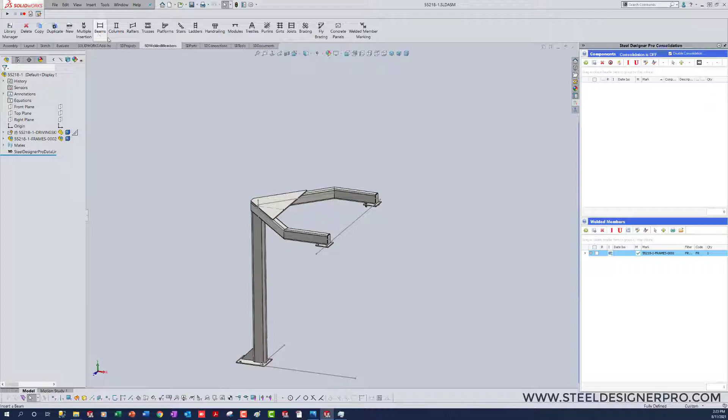Our next welded member is going to be a beam to hang underneath this. It looks like something's not wanting to cooperate with me. Okay, there we go.

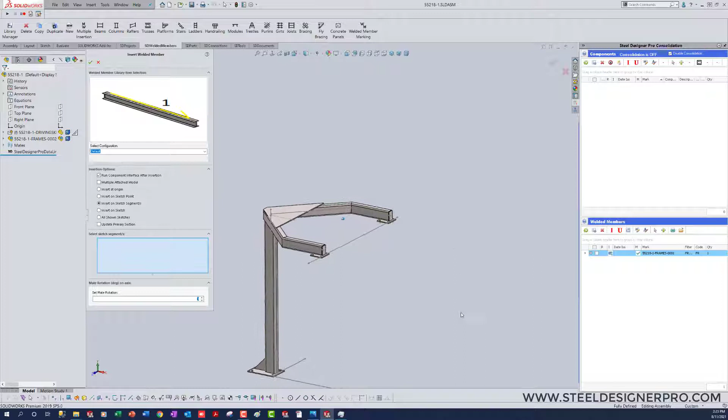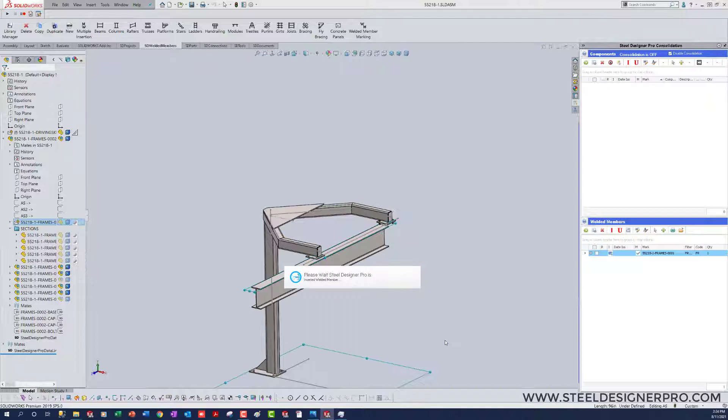So we're going to drop that beam on this line. We'll go ahead and update its section to where it's about a 6 by 12. That brings the beam in from the library, it's updating the section size, and all the associated drawings are coming with it.

And have a tool to hide all those weldment profiles, but it's usually just quicker to do these now.

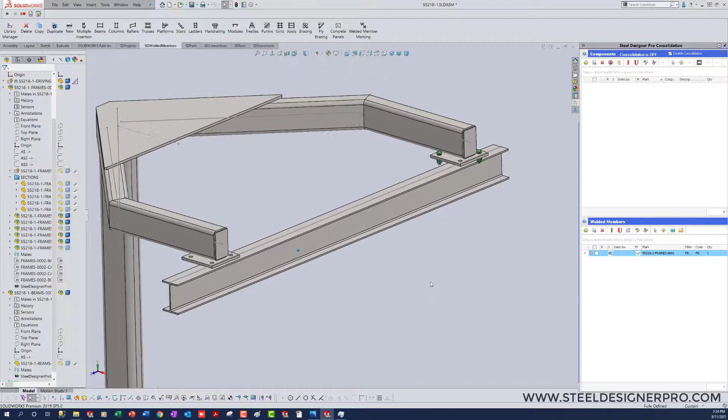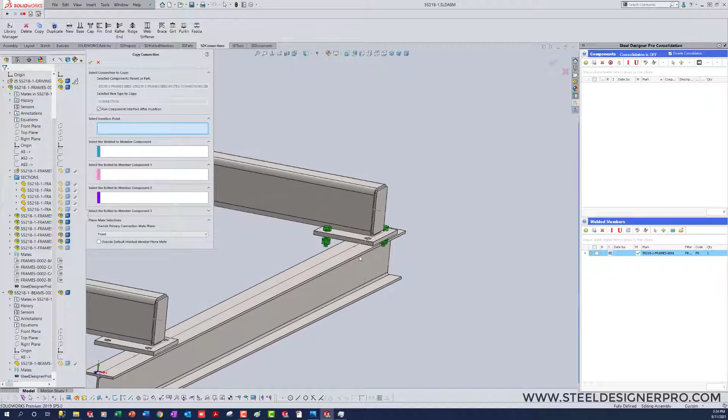I need this connection on top of this beam. It's going to flip itself around and get confused, but it's much faster to just fix the connection than to create another one. So it goes in this spot, it attaches to that welded member.

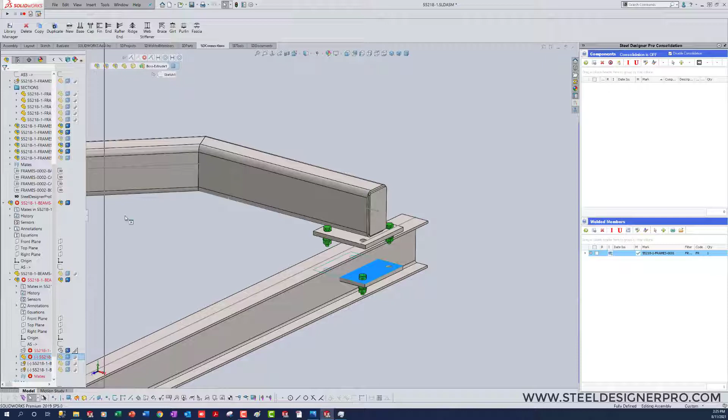And it will get a little confused since it went from HSS to W section. So what we're going to do is first modify section to make this, grab that and put it in the correct spot.

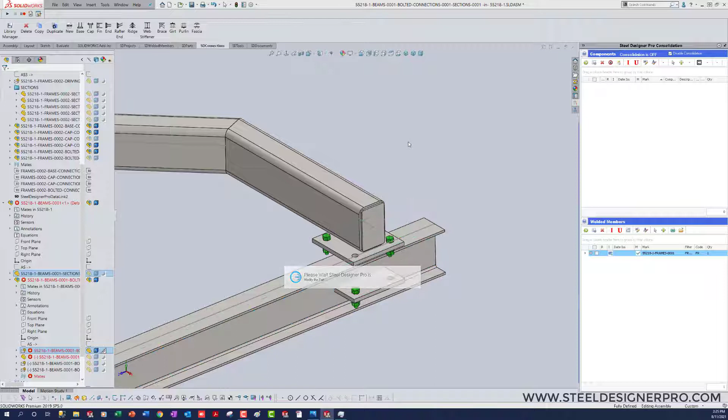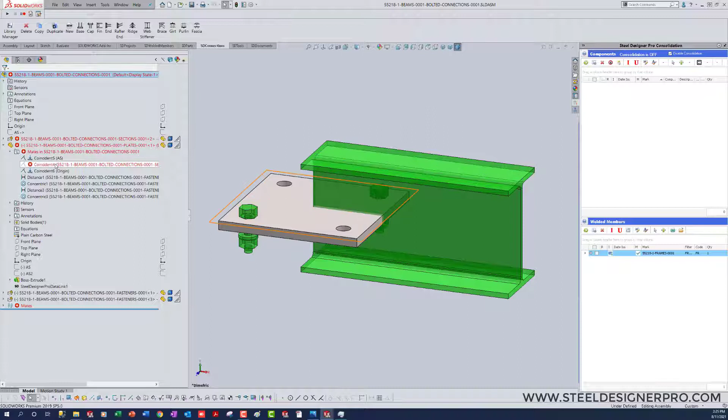Now we'll open this connection. And this plate has lost that face reference.

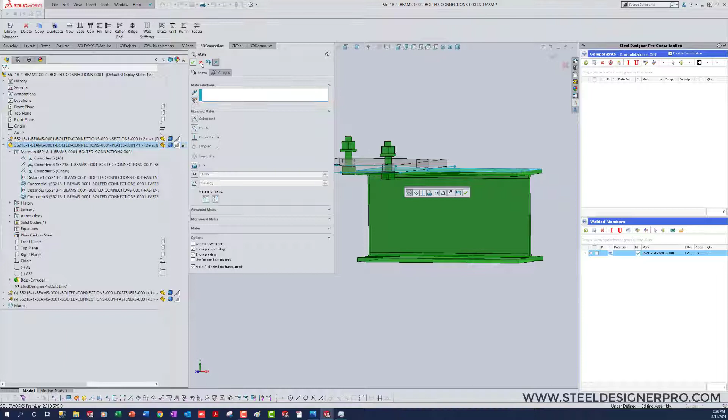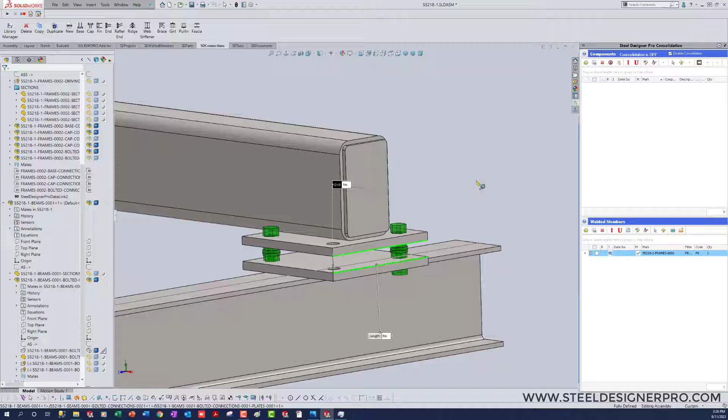And we want to anti-align it. So that's all that's required to clean that up, except for the fact that I didn't choose quite the right dimension here. Yep, off by 1 inch.

Which is very easy to fix in the frame's driving sketch. So the drop plane should have only been 4 inches.

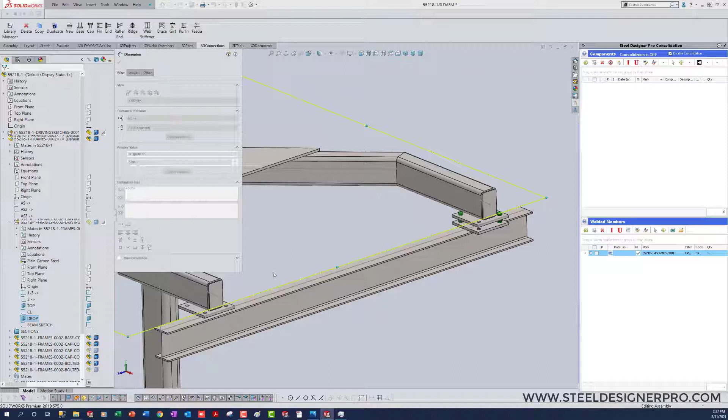And it seems that I still chose my bolts wrong. So I've got doubled up bolts, but I still have the correct number of bolts. And in the beam, here's the bolted connection.

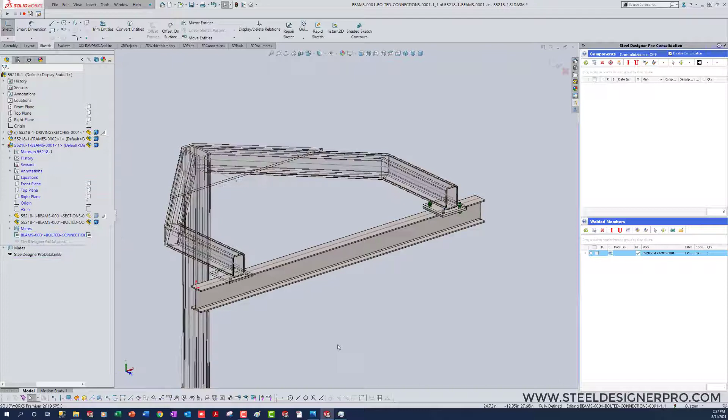So what I'll do is I'll edit this sketch and just convert that point as well. So I can go to this beam and copy that connection.

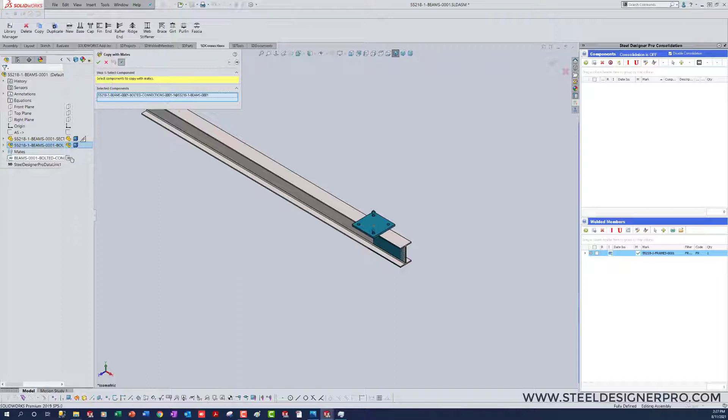And those fasteners are there, they're just hidden as well. So we've created the beam, got it all bolted up.

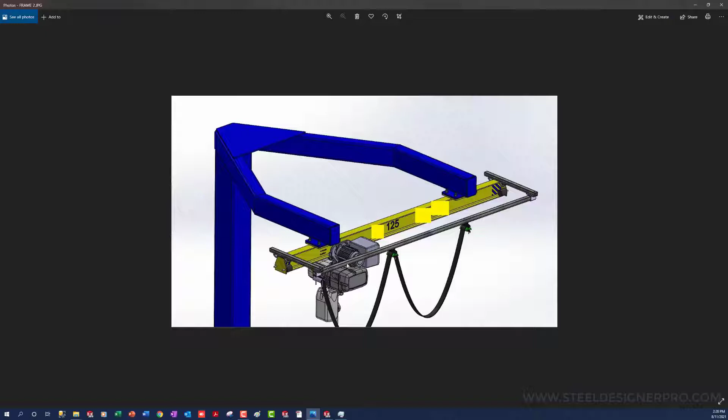Now there's an end cap on each of this and a trolley. And of course I'm not going to put the whole trolley in, but there's a simple way to put that in. So the first thing we're going to do is put the end cap in.

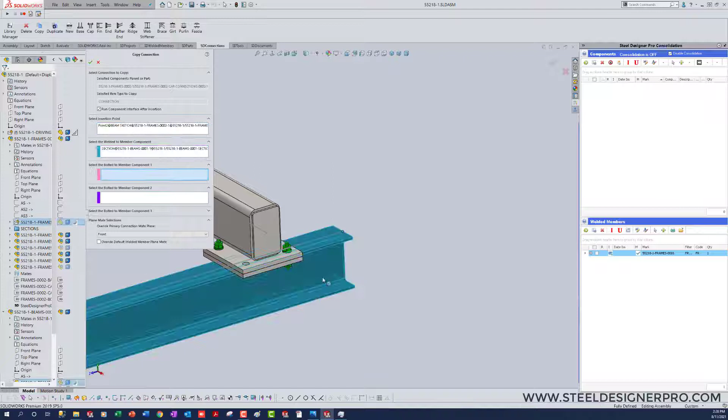Now we have a cap connection here, and just like when we copied this over, it's going to freak out a little bit, but it's so much easier to fix it than it is to do it again.

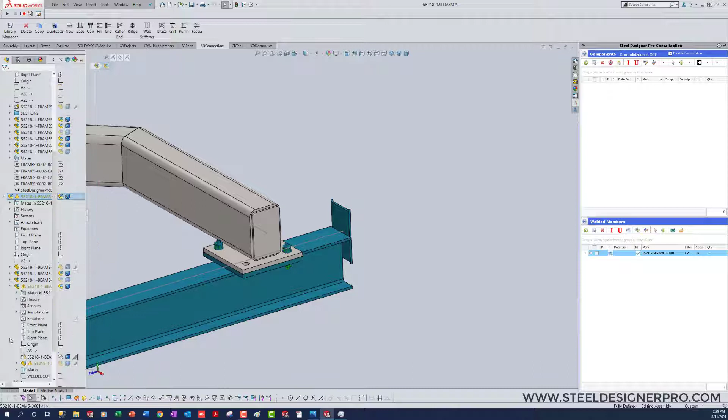So now the beam, said it's faulted there. It's faulted because the plate has lost its mind. And we'll do the other modify section to make these two match.

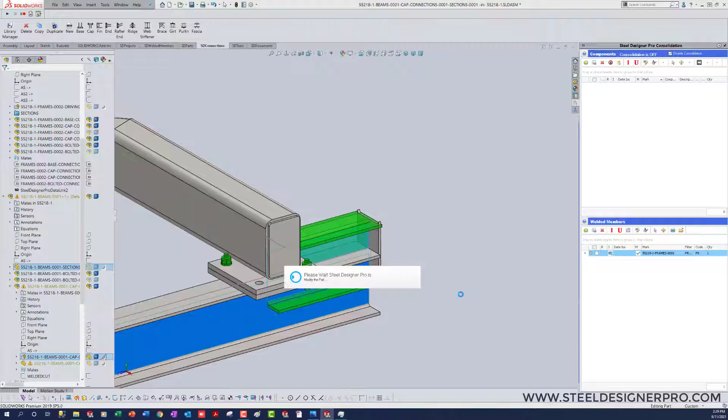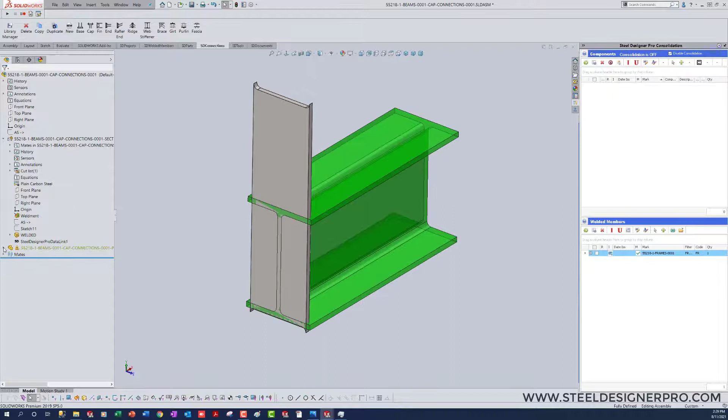There we go. Now we'll grab that assembly. And for one thing, what we're going to do is we're going to get rid of the welded cut. We're not going to have this beam get cut. So we'll just edit this feature, flip its direction, and make it 1/2 inch.

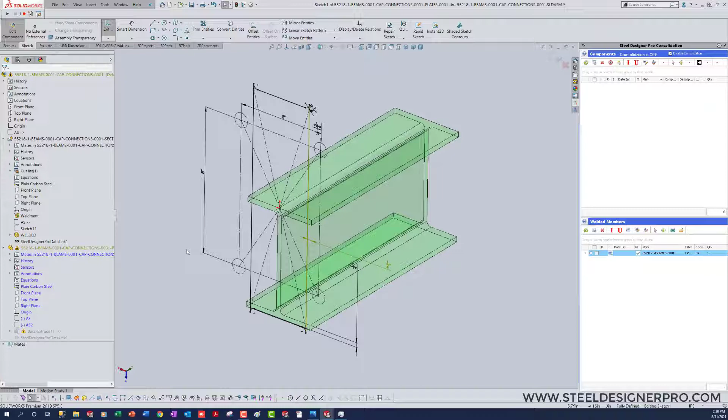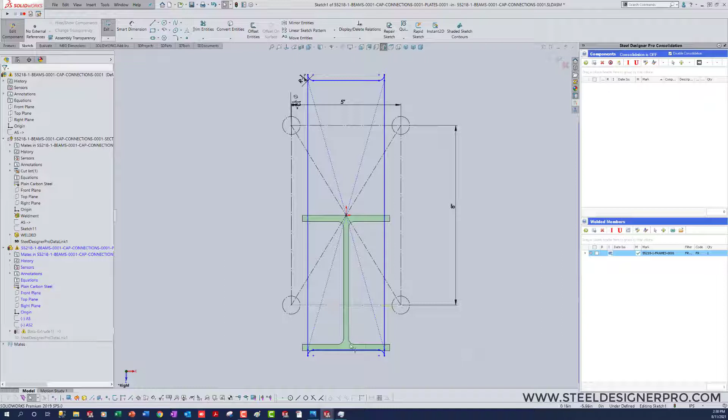Now we're going to edit the sketch and do a few things. So we'll take and get rid of, hang on. Don't want to do that, hang on.

Let's see how much work I can save myself. Aha, yes, there we go. There we go.

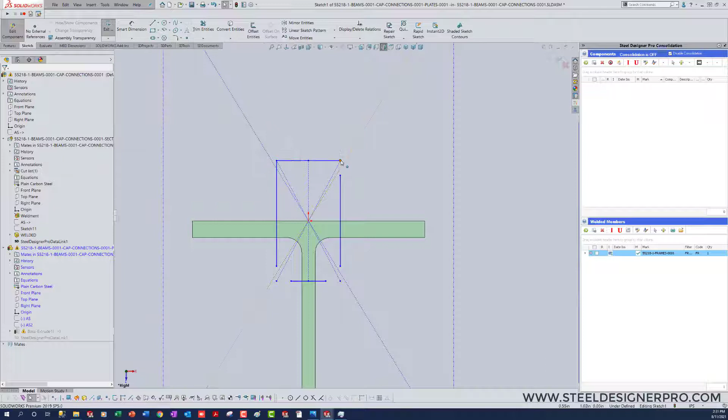So we're going to merge those points together, merge those points together, get rid of those verticals.

So that we can then pull a line down here, here. Oops.

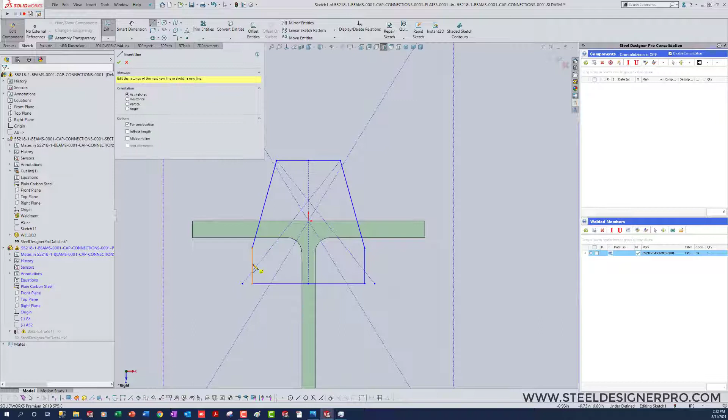So I need a hole here for later, and I need that and that.

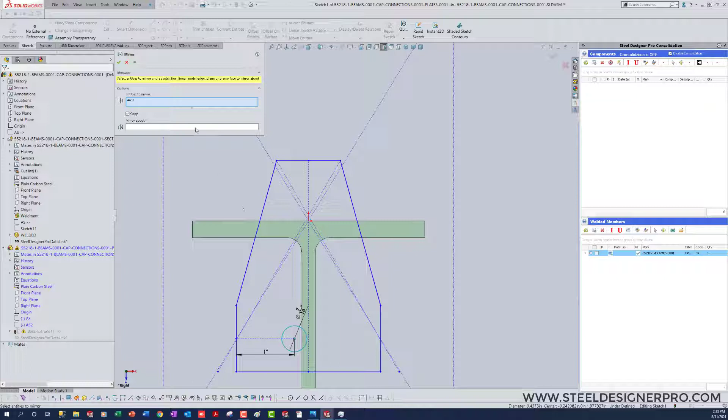Oh, my mirror entities command's shortcut is gone. Okay.

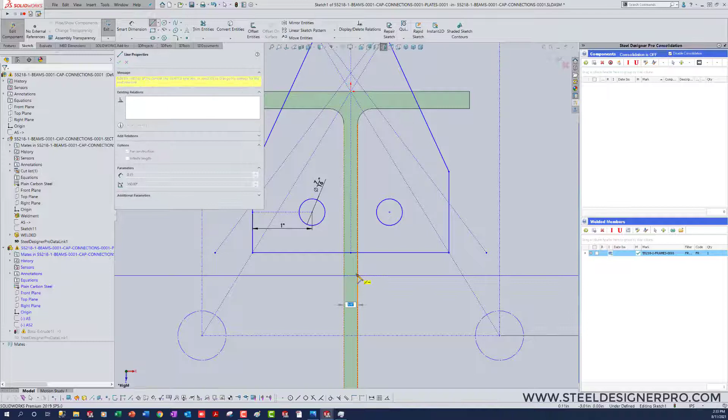So we're going to pull this up a little bit so that we can get to the midpoints there. We'll select the midpoint of this and make it the midpoint there.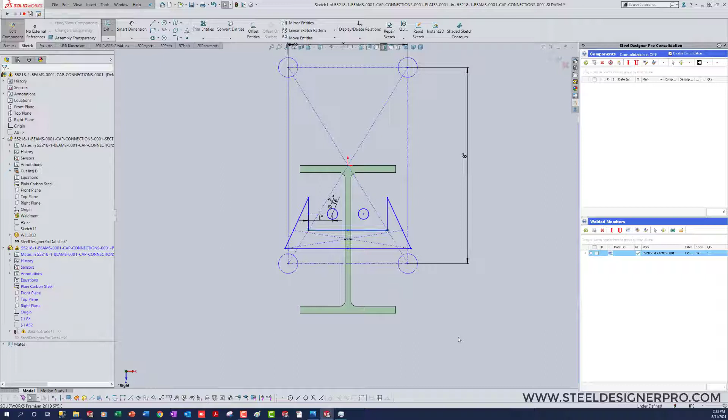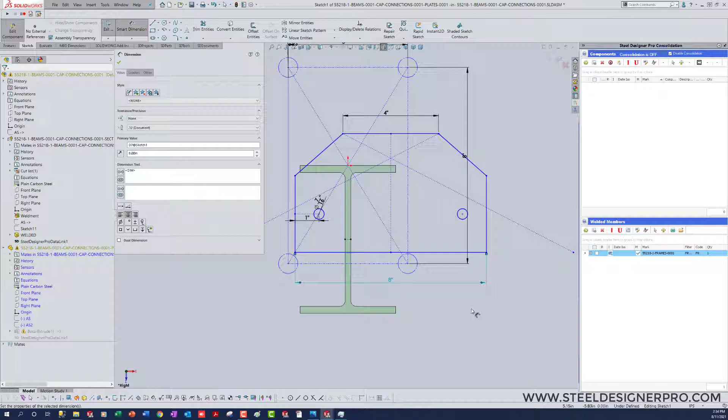Oh. Okay. There we go. So those things do not freak out so much.

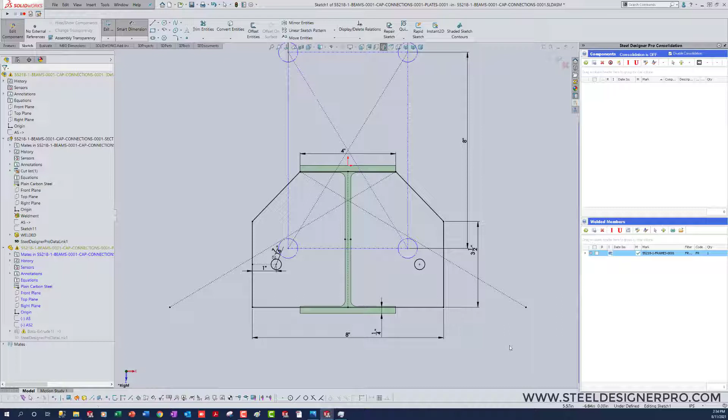And I actually already had holes in there, so why don't I make use of them, since they're already dimensioned in the drawing.

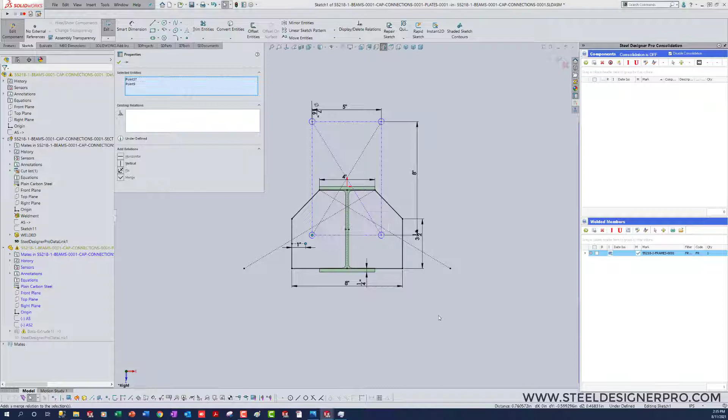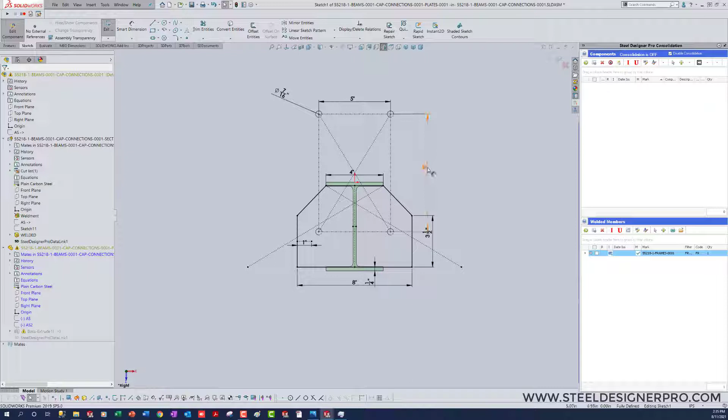Why do you not want to? Oh, because... make it coincident there. There's a dimension holding that. That is not supposed to be there. There we go.

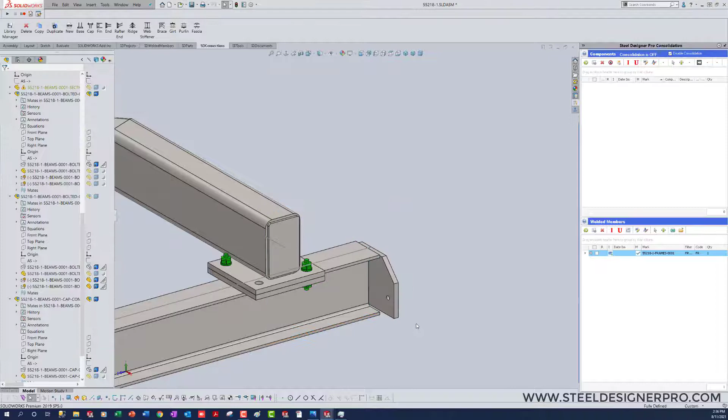So now we have a plate on the end for our connection. Swap over and look at it. Looks like we got a little too high on that. There we go.

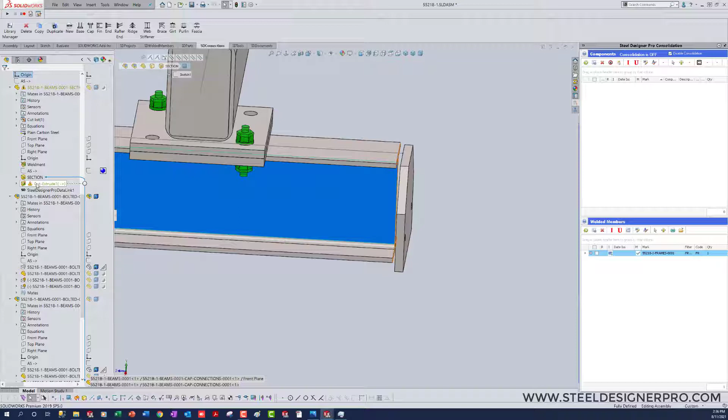And the beam already got its cut extrude, so we'll remove that.

Now, this connection needs a couple of rubber bumpers on it, and we can use McMaster-Carr to find a rubber bumper.

But to put it in here, we'll go to Parts, New. We're going to choose a vendor item, and just a blank vendor item. Insert it at the origin and click OK.

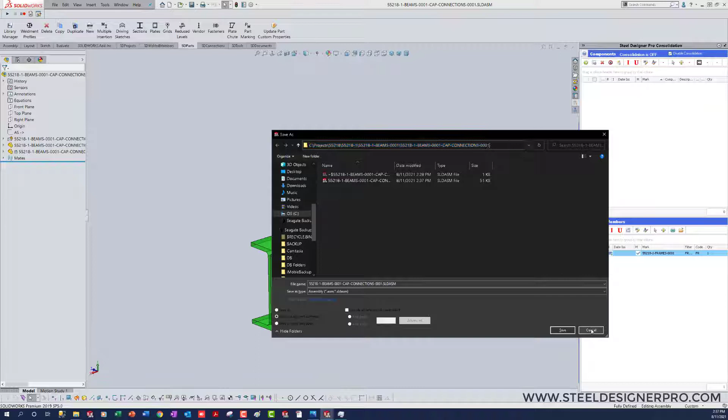Now we suppress. Actually, the first thing we'll do is a save as, copy that path, suppress this, and save the file.

I've downloaded a model, and now we'll just save that model as our vendor item.

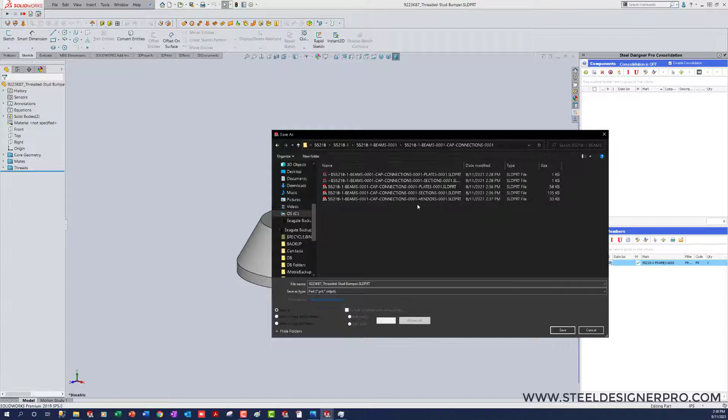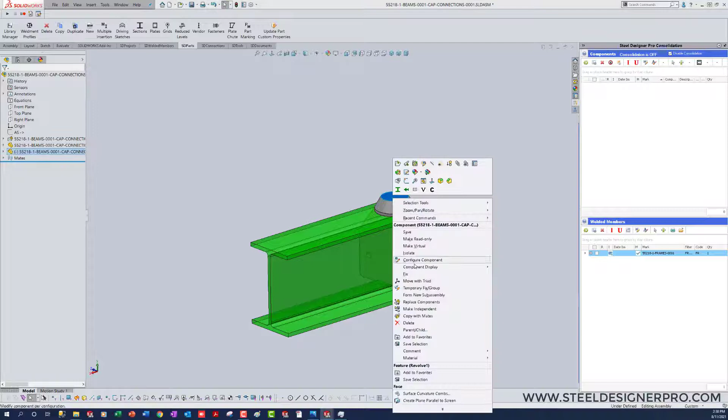Yes, I want to replace it, and it has to be suppressed or it can't do it. Now you can unsuppress this model, float it, move it, and put it in place.

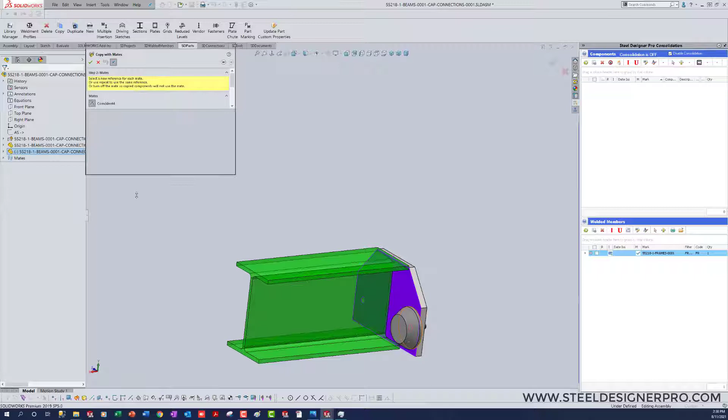And since you need two of them, might as well go ahead and do it now. Okay, there are two rubber bumpers.

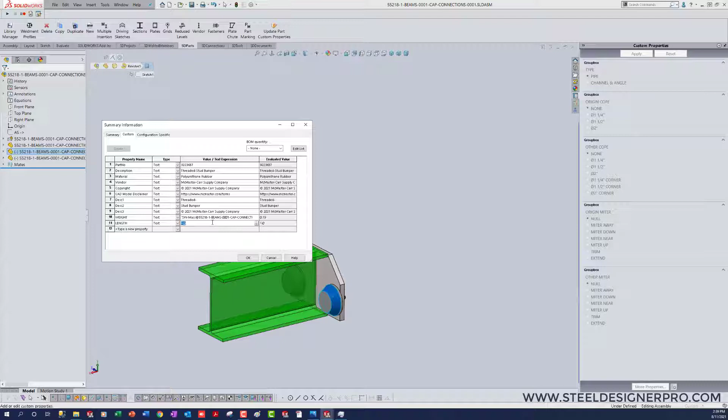Now, the vendor items need to have a description. We can leave that one. The weight, that being the mass, and usually a length. Let's see how, and what do you know, I got the length right. And you can also put nuts and washers and stuff. So now we have our bumpers in there.

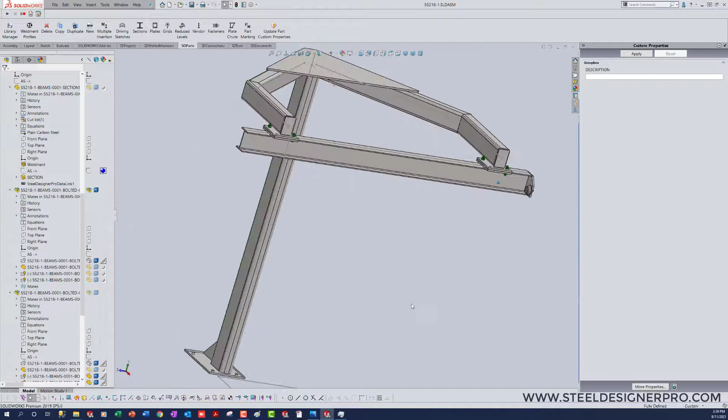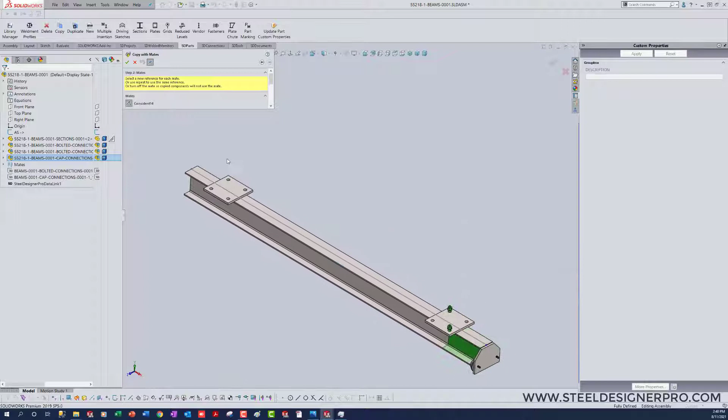So now we'll go to the beam, put this connection on the other end. Parallel, repeat the top, and take the front and flip it.

Oops. Let's do the front, but flip. I do want to repeat that.

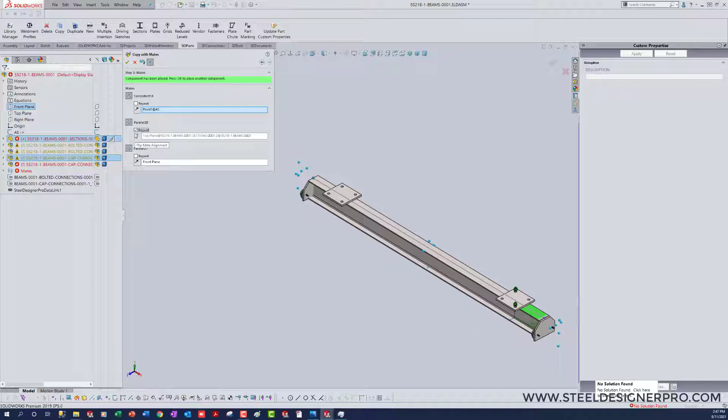Okay, so something messed up with those mates. Coincident? There it went, that was the direction it needed to go.

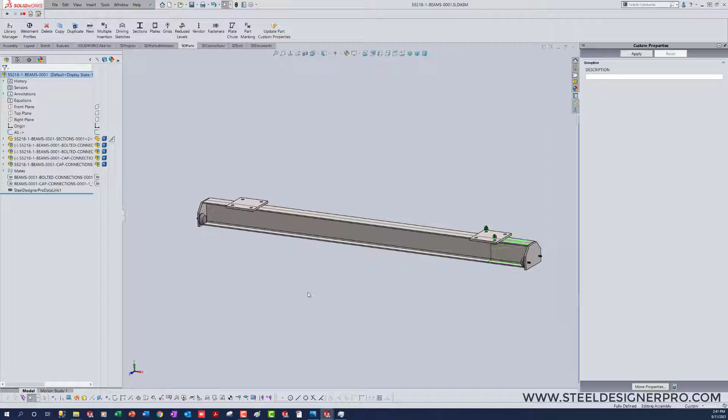So now within this assembly, we want a new part. That's a vendor. Just choose a blank. We'll insert it at the origin.

Why? And I don't know why SolidWorks has decided that it's suddenly going to lose its mind.

Does suppressing that help it? No, it doesn't.

But we'll go ahead and get the trolley in place. We're going to save this. It goes in the same beam, but it's a new vendor item.

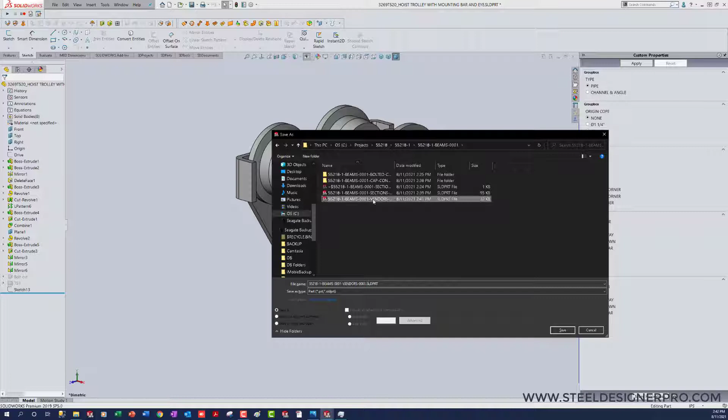Why did SolidWorks... why do you hate me?

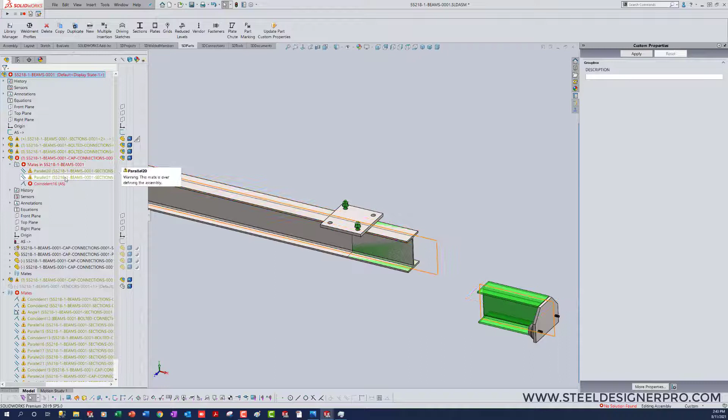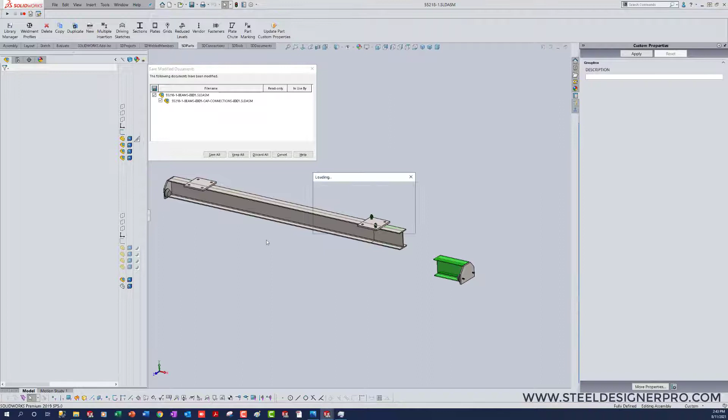Okay, we're going to close that. SolidWorks is kind of losing its mind.

And go figure out what's wrong. Steel Designer Pro does not use any external code with things, so it doesn't like something about that connection.

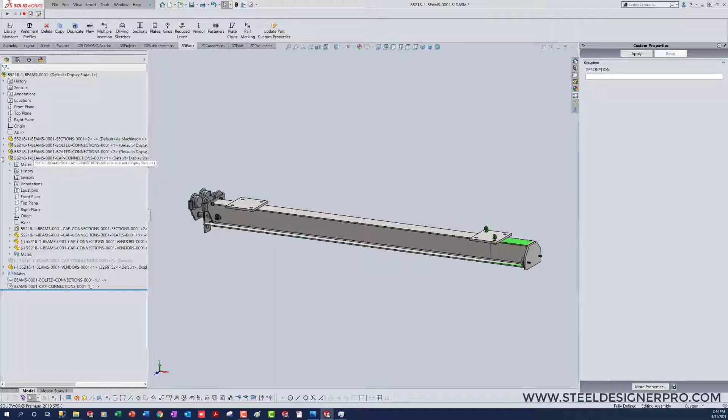Oh, come on. So this trolley, its right plane and the front plane need to be coincident.

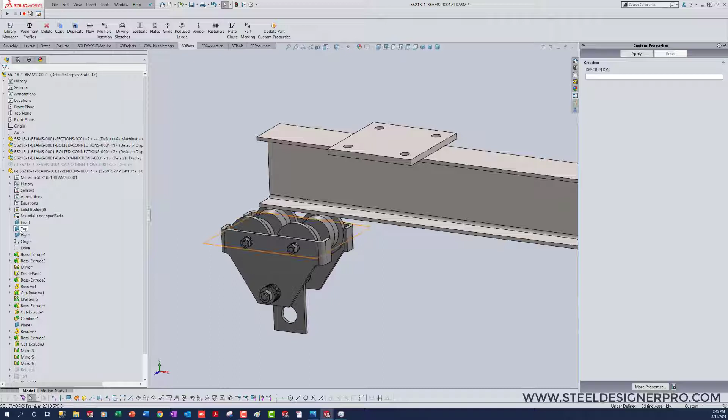Make the top planes parallel, and use the least restrictive mate possible. So make it tangent. Why did it not like that?

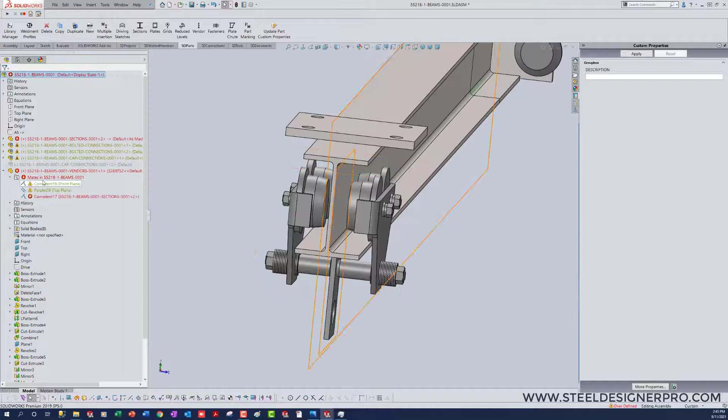Oh, it didn't use the right mate. Tangent, I told you. So now your trolley's in there.

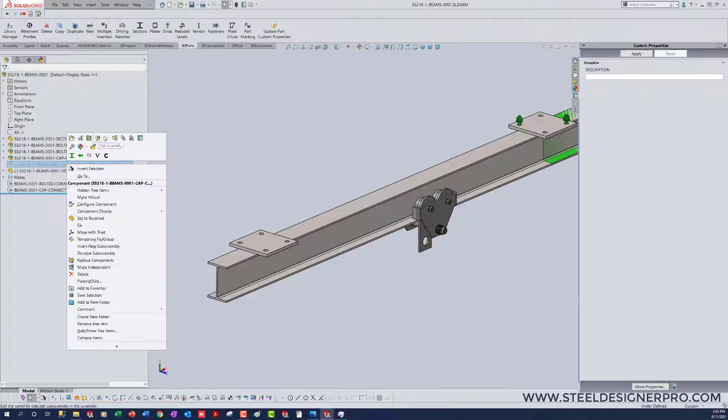And now we figure out why this connection does not want to. Well, let's just delete all of its mates. What about if its origin and the origin of the component are coincident? That takes care of everything.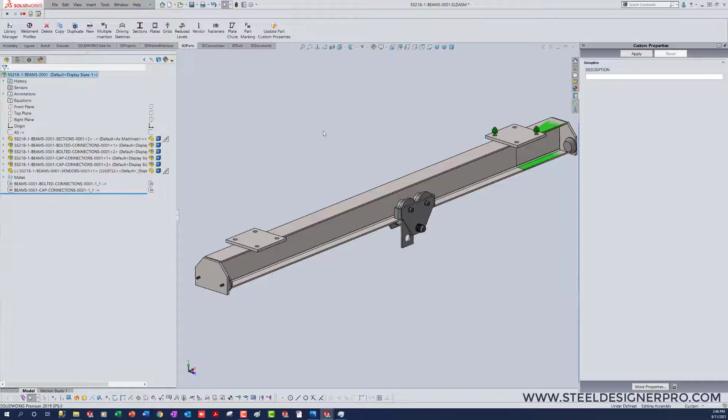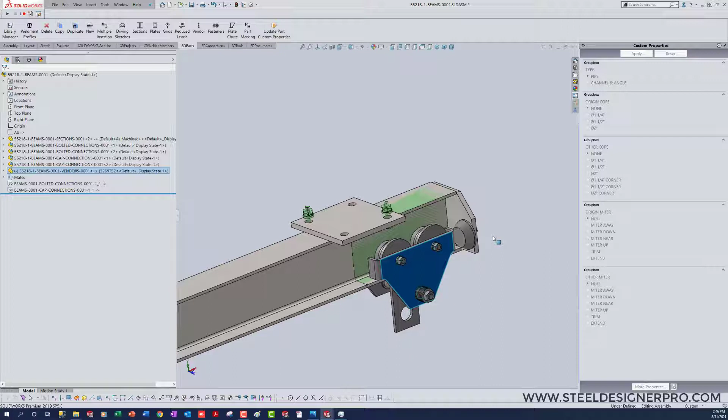I wanted to check on my beam, did I put my trolley in the right place and my bumpers in the right place? Appears that I've gotten them too low and too far out.

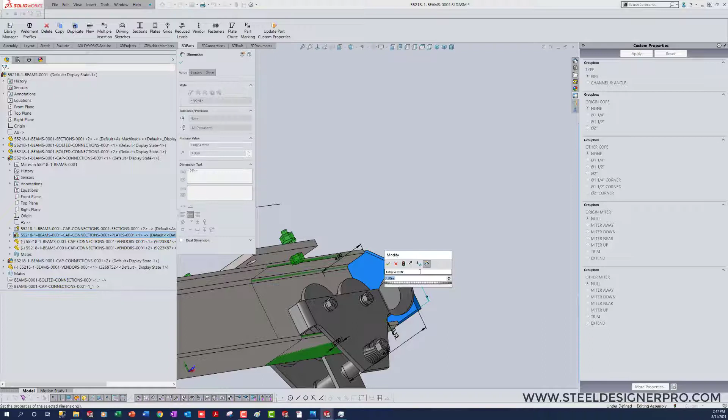So bring that in 2 inches, and we'll make that 4.5 inches. And we could bring that back down just a little bit, 4 inches.

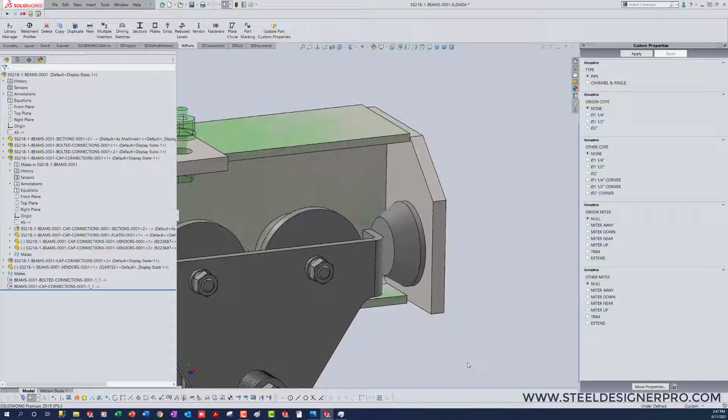There we go. Now we have a nice bumper. It's going to catch all that.

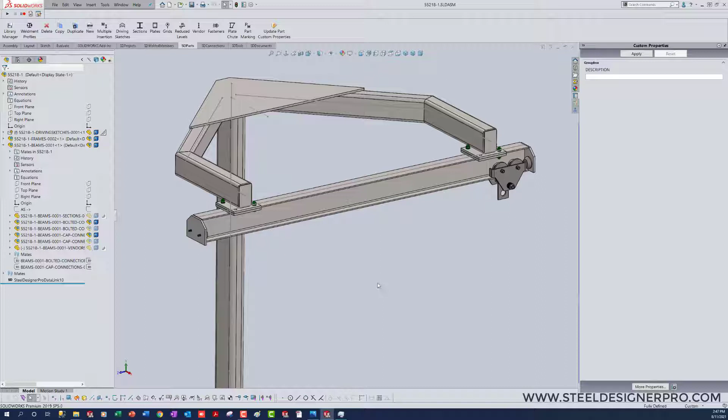So this is now completely modeled in 1 hour and 15 minutes. And I'm going to stop this and take a break for a bit, and then I will do all of the drawings.